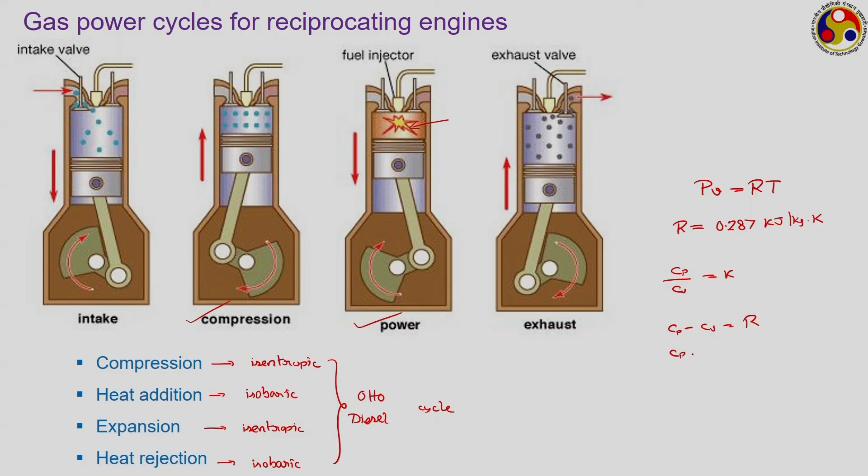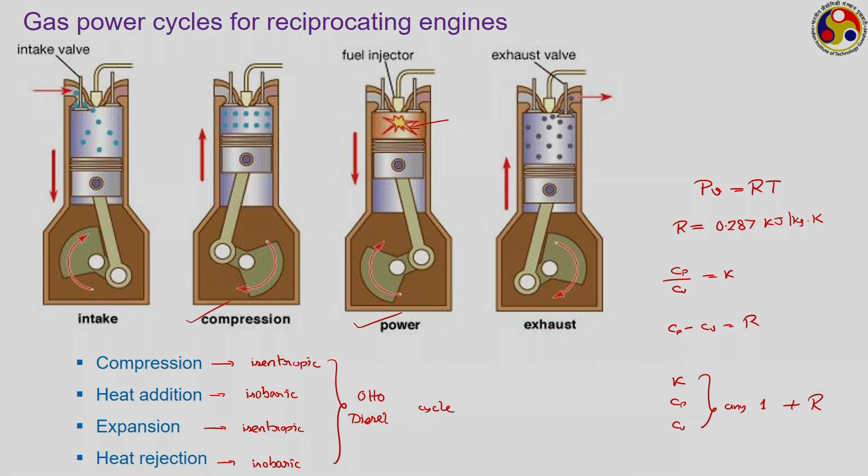Therefore, if we know any one of these three - K, Cp and Cv - plus R, which is already there, we can calculate the other two. So though in several textbooks you may find given values of Cp, Cv etc., we shall follow this methodology where we take R as a constant, specify one of the three - either K, Cp or Cv - and the remaining two need to be calculated for any given situation.

Now we move to the Otto cycle. These slides I have shown in the previous lecture itself. Nikolaus Otto is a German who was the first to conceptually develop this cycle. The one shown here is what goes in practice, but this is the corresponding air standard version of it.

We have the isentropic compression process as 1 to 2. So we have 1 to 2 as isentropic compression, then 2 to 3 as isochoric heat addition, then 3 to 4. What is 3 to 4? It is again another isentropic process, but during which volume is increasing and pressure is decreasing - an isentropic expansion process. And 4 to 1 is isochoric, as discussed in the previous slide - an isochoric heat rejection process during which volume remains constant.

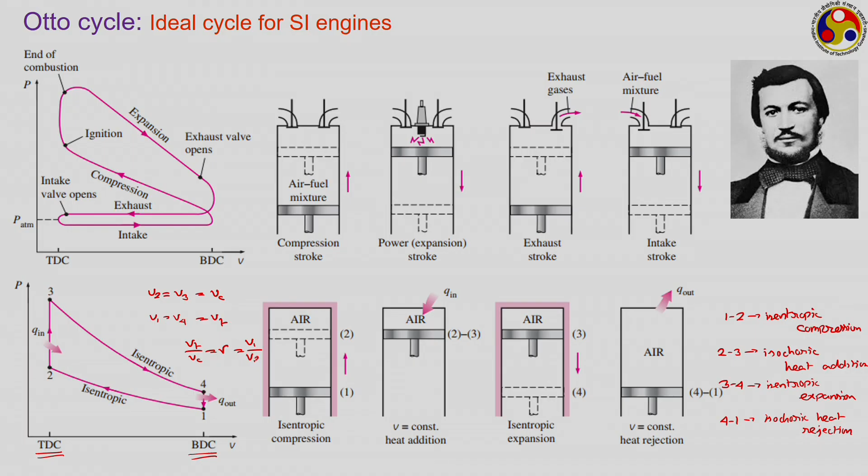Here the smallest possible volume the system can have is V2, which equals V3, corresponding to the top dead center. This volume V2, equal to V3, is nothing but the clearance volume, because the piston is at top dead center at that location. Whereas V1 and V4 are also equal, since 4 to 1 is isochoric, and this corresponds to the bottom dead center with total volume. As per our definition, Vt upon Vc gives the compression ratio. So this compression ratio can be represented as V1 upon V2, or in terms of V3 and V4 as well.

We have to perform the mathematical analysis quickly, something we've done in the previous lecture, but I'd like to repeat it because of a mistake I made there that I don't want to repeat. We know that the amount of heat transfer can be used to get the expression for efficiency, sometimes called thermal efficiency or first law efficiency, which is net work output divided by heat input. We use small w and small q to denote per unit mass quantities, and using the first law expression we can write this as 1 minus q out upon q in. So we have to get q out and q in. During process 2 to 3 we have heat addition, during 4 to 1 we have heat rejection, whereas during 1 to 2 and 3 to 4 there is no heat transfer. We have to analyze each process individually to get q out and q in. As there's no heat transfer with two of the processes, let's skip them for the moment and analyze 2 to 3 first.

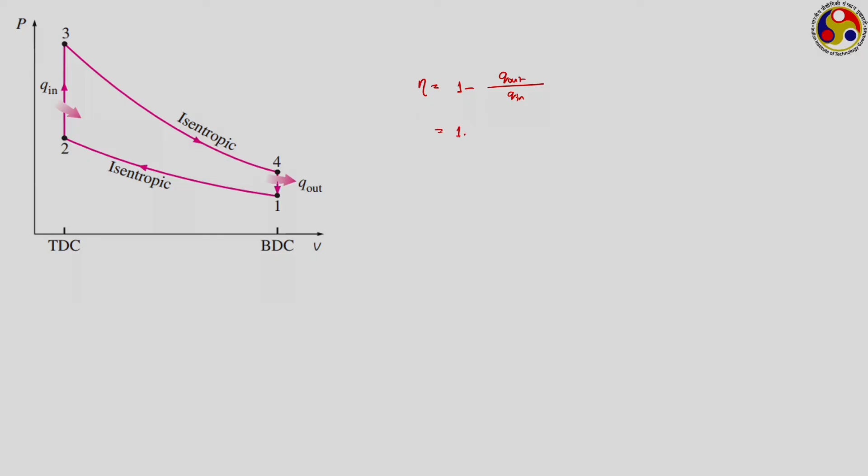Now we go back to our expression for efficiency, which is 1 minus Q out upon Q in. That is 1 minus, using the expressions derived here: Q out is Cv into T4 minus T1, Cv into T4 minus T1 by Cv into what was our Q in, Cv into T3 minus T2.

So Cv cancels out, and by taking T1 common from the numerator and T2 from the denominator, we can write this as T1 into (T4 upon T1 minus 1) by T2 into (T3 upon T2 minus 1).

Now, to get the values for these temperatures, we have to look at the other two processes, these two isentropic processes. During 1 to 2, being an isentropic process, the process equation can often be represented as Pv to the power k equal to constant, where k is the ratio of specific heats, and from the ideal gas equation of state we know that Pv equal to RT.

If we impose it here, we can write this to be Tv to the power k minus 1 equal to another constant. So if we use this for the process 1 to 2, I would like to request you to check this, from Pv to the power k, how we are getting Tv to the power k minus 1 by using Pv equal to RT. R becomes a part of this constant now. We just have to replace P.

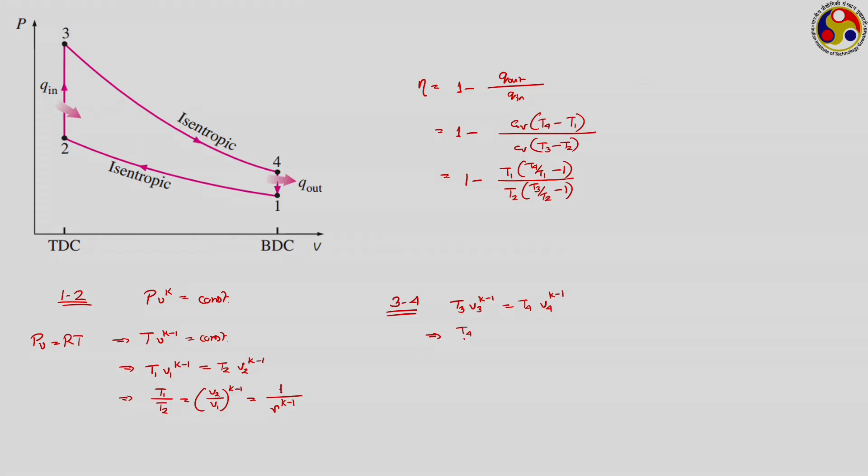Now check out process 3 to 4, another isentropic process. During this process we have T3 V3 to the power k minus 1 is equal to T4 V4 to the power k minus 1, which gives us T4 upon T3 to be equal to

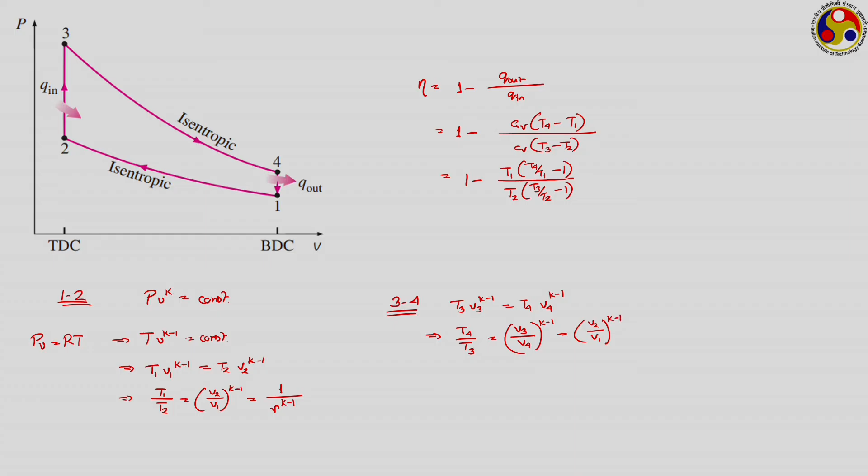V3 upon V4 to the power k minus 1. Considering the two isentropic processes, we know that V3 is equal to V2 and V4 is equal to V1, to the power k minus 1, and from here we know that V1 upon V2 is R. So it is 1 by R to the power k minus 1.

So what do we have then? We can write T1 upon T2 is equal to T4 upon T3, or if we reorient this, we can write T4 upon T1 is equal to T3 upon T2.

So, if we take it back to the expression for eta, then we are left with 1 minus T1 upon T2, and T1 upon T2 is nothing but this. So, we have 1 minus 1 by R to the power k minus 1.

So, the thermal efficiency for the Otto cycle is a sole function of the compression ratio and the K for the substance. It depends on only two things: one is the compression ratio, and another is the K for the substance. For a given substance, K can be taken as a constant, so it depends only on the compression ratio.

And like I mentioned in the previous lecture, compression ratio is the first and most important parameter that can govern the performance of a system. So, that is what you have here: the efficiency depends only on the compression ratio for a given substance.

This way you can calculate the efficiency. If your objective is to get some other parameter, like if you want to calculate the work output, how can you get it? The net work output, W net, can easily be obtained as eta thermal into Q in, from the efficiency expression. This way you can calculate the work output.

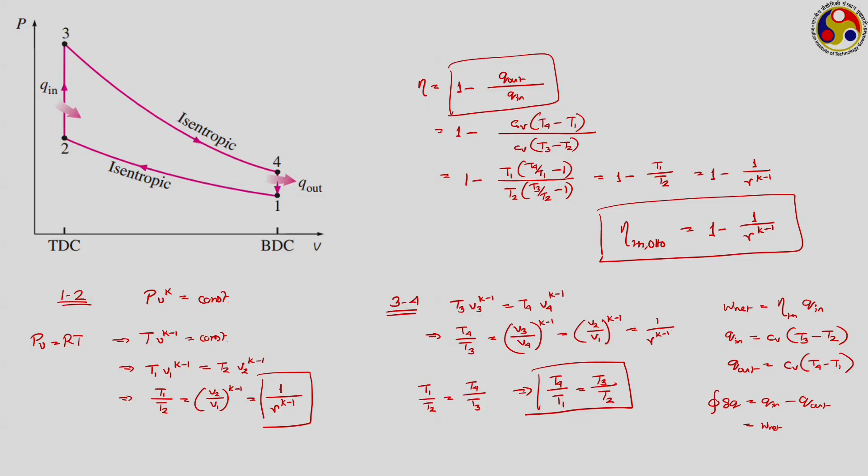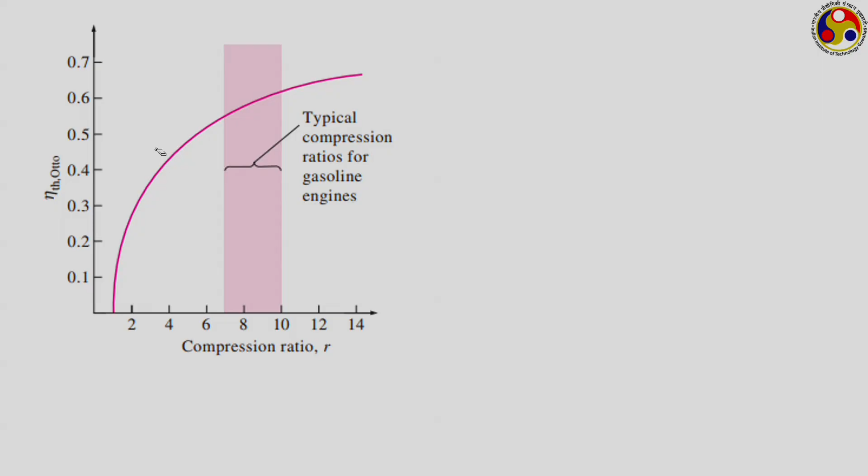Similarly, the effect of K is something like this: larger the value of K, higher will be the efficiency for a given compression ratio. So if we have two identical SI engines, one working on helium, which is a monoatomic gas, and another working on air, which can be visualized as a diatomic gas, then the helium one is going to give you higher efficiency because for the same compression ratio it has a higher value of K.

This corresponds roughly to monoatomic gases, this is approximately for diatomic gases, this is approximately for triatomic gases. So as K keeps on increasing, the thermal efficiency keeps on reducing. In practical engines, we generally have heavier molecules like carbon dioxide, carbon monoxide, or sometimes methane, which have much lower value of K, in the range of 1.2 or even lower, so their efficiency will definitely be much lower compared to these ideal cycles.

Now, you can see here I have given a range of typical compression ratios for gasoline engines. If we can get higher efficiency by working at a higher compression ratio, then why are we not going for such very high compression ratios, why are we restricting it to such a narrow band, something like 7 to 10 as shown here? Practical SI engines hardly have compression ratio greater than 10 or 12. That is because of temperature considerations.

You can see from the previous slides that as the compression ratio increases, the temperature also increases, because T2 is equal to T1 into R to the power K minus 1. So as R increases, T2 keeps on increasing. Higher the compression ratio, the temperature of the gas or air at the end of compression also keeps on increasing.

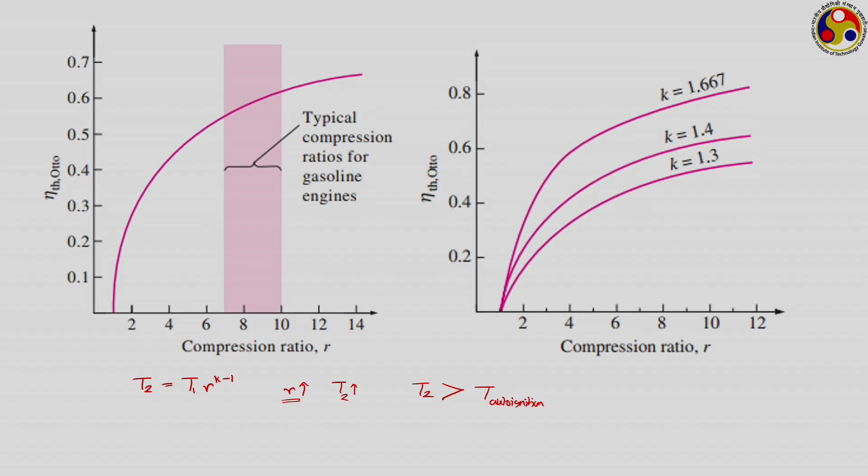If the fuel auto ignites, that leads to something known as engine knocking. There is a number called the octane number. I can't discuss this in detail since it's beyond our scope, but the octane number is generally a criteria related to this auto ignition temperature, and it identifies whether the fuel is going to auto ignite or not for a given compression ratio range. So in a nutshell, keeping the auto ignition temperature in mind, we have to keep the compression ratio limited.

Several attempts have been made to improve this octane number and thereby increase the auto ignition temperature. Since the 1920s, people started adding lead to gasoline fuels, which is a quite inexpensive option for increasing the octane number. Addition of lead has shown to increase the auto ignition temperature quite markedly.

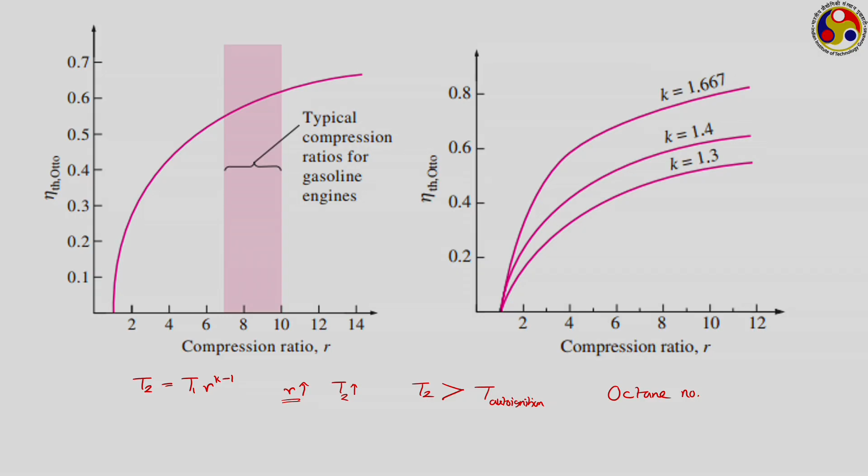However, when we came to the 1970s, it was observed that because of the presence of lead during the combustion process, lead participates in the chemical reaction and produces several very harmful gases, which are harmful to our health and of course lead to severe environmental pollution.

And that is why since 1975 gradually lead has been phased out from gasoline because of international protocol. In fact, automobile vehicles fabricated after 1975 are all suitable for unleaded gasoline, and so we are back to lower compression ratios.

Nowadays people use several kinds of gasoline blends, etc., which have been able to increase the auto ignition temperature a bit, causing some small change in the effective range of compression ratios, but still some way to go. This is a very active and open area of research, where we are looking to increase the auto ignition temperature of the fuel by making some blend or adding something to the raw gasoline, so that we can cause some increase in the compression ratio.

Even one level increase in the compression ratio can cause some 2-3% change in this Otto cycle efficiency, which can actually lead to a huge amount of fuel saving. That is why it is extremely important.

Now we move to the second one, the ideal cycle for CI engines, the diesel cycle, where we can go beyond this auto ignition temperature limit and reach much higher compression ratios. As the name suggests, it is the engine which uses diesel group of fuels as the working fuel. Rudolf Diesel, the picture shown here, was the German scientist who was the first inventor of the CI engine concept. The most important difference between SI engine and CI engine lies in the ignition process.

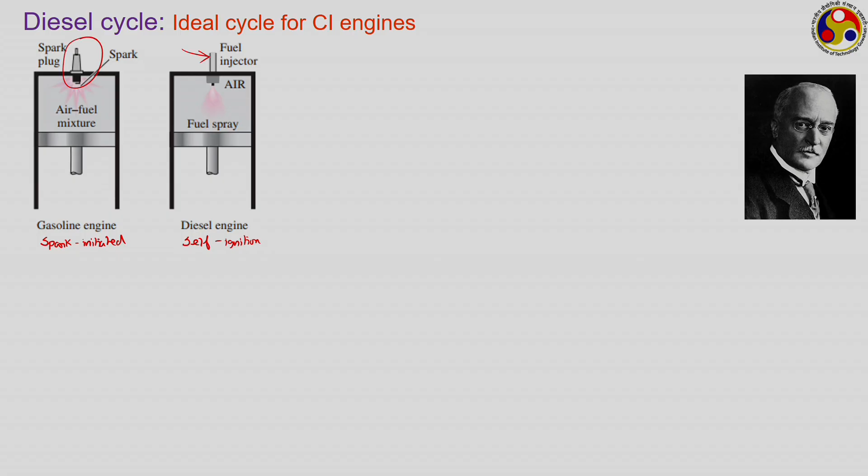In order to have this self ignition only, we supply only air during the intake process and compress that air to a very high temperature, and then the fuel is sprayed inside. That is a major difference in CI engines: it is only air which is supplied during the intake process, and only air is compressed because there is no fuel inside.

So we do not have to be bothered about the auto ignition temperature limit. We can compress air to very high pressure levels, and therefore we can go to much higher compression ratios in case of CI engines. Fuel is injected at the end of the compression process, and as the fuel comes in, invariably the temperature is well above its auto ignition temperature, and therefore the fuel auto ignites.

Then spark plug and carburetor are not required, because we do not need to produce any spark, and we are not preparing a fuel air mixture. Air is supplied at the beginning of the inlet process, and fuel is sprayed after the compression process. So carburetor is also not required, but we have a fuel injector, and we generally also need a fuel pump, because the pressure of the fuel needs to be higher than the pressure of air for it to be sprayed inside.

So we need a fuel pump and a fuel injector or spray gun, which are in fact much costlier and heavier compared to the spark plugs and carburetors, and also a higher compression ratio, as I have mentioned.

But one drawback here is the possibility of incomplete combustion, because in case of SI engine, the fuel and air are uniformly mixed in the carburetor before being supplied to the cylinder, so every fuel molecule generally has a sufficient number of air molecules around it. But here in the diesel engine, as the fuel is being sprayed inside, it is very much possible that some fuel droplets or fuel molecules may get sufficient oxygen in the neighborhood, and some droplets may not get any.

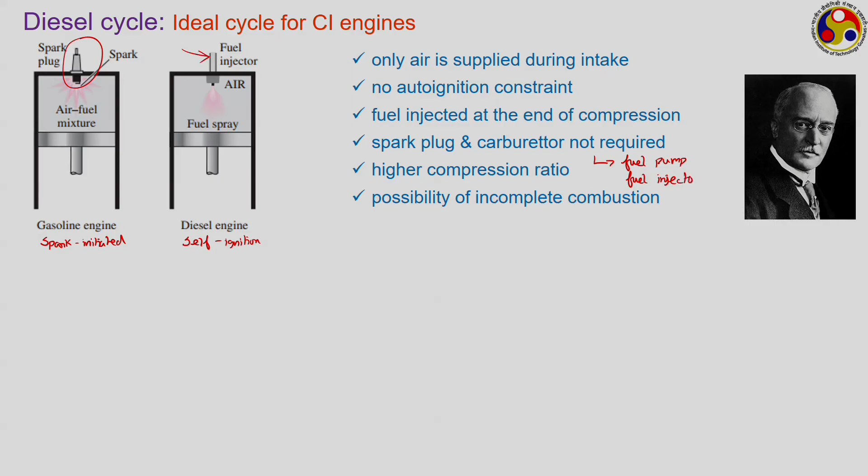So it is possible some amount of fuel may remain unburned, leading to incomplete combustion, loss of fuel, and subsequent pollution problems, which is not that significant for SI engines. So spark plug and carburetor are not there; instead we have a fuel pump and fuel injector, which are costlier and heavier compared to spark plugs and carburetors.

The heat addition in the ideal cycle is visualized as constant volume, because in case of SI engine, as soon as we initiate the spark, combustion happens almost instantaneously before the piston starts to move again. That is why we assume it to be a constant volume combustion.

However, in case of CI engines, as we are spraying the fuel, that requires a substantial amount of time to supply a fixed mass of fuel, and by that time the piston keeps on moving. So we generally try to spray the fuel such that the pressure inside remains constant, achieving this combustion process at constant pressure. However, there is a change in volume.

We of course want to reduce this to a smaller level, but that depends upon how much mass of fuel you have to inject and also the design of the injector.

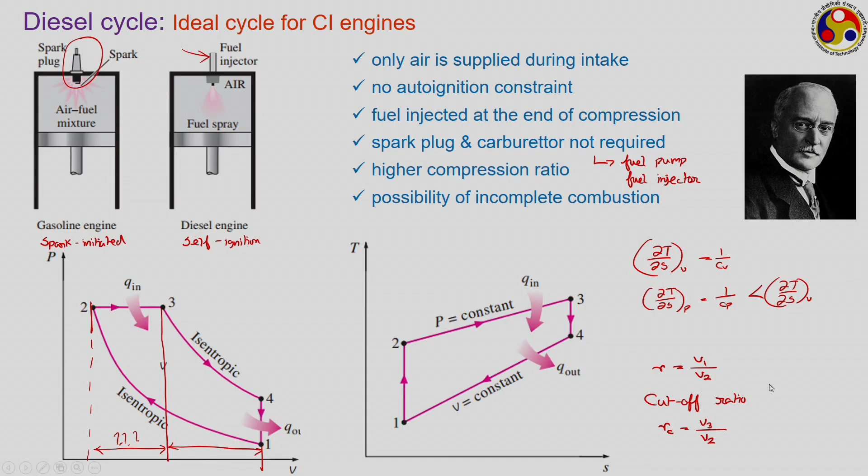Here we define a new parameter called the cutoff ratio, given by Rc, which is volume after combustion, V3, by volume before combustion, V2, that is volume at the end of combustion to volume at the beginning of combustion. This is a new parameter required for diesel engines.

So if we analyze it again, let us try to do it quickly. The thermal efficiency is again 1 minus Q out by Q in, for process 2 to 3.

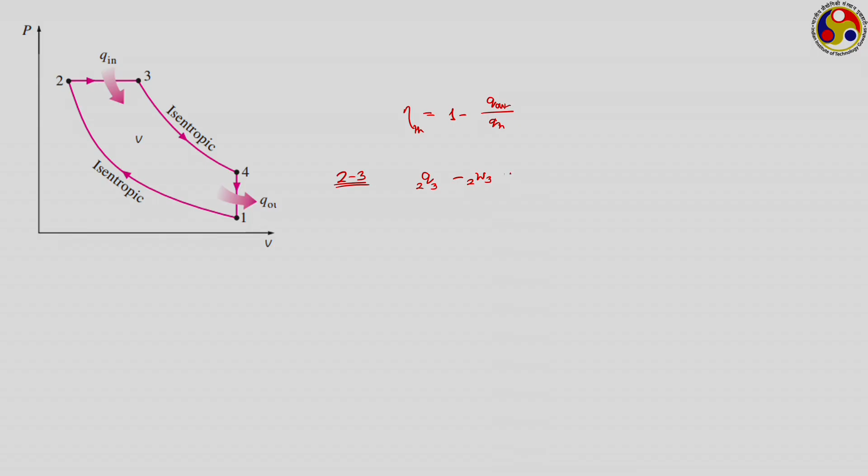For process 2 to 3, Q 2 to 3 minus W 2 to 3 is equal to U3 minus U2, as earlier. Now, Q 2 to 3 is Q in, but W 2 to 3 is not 0 in this case, because it is not a constant volume process. W 2 to 3 is equal to the integral from 2 to 3 of P dV.

Now pressure remains constant during this process, isn't it? So you can write this to be equal to P into V3 minus V2. So Q in will be U3 minus U2 plus P into V3 minus V2, that is we can write this to be equal to U3 plus P3 V3 minus U2 plus P2 V2, as P2 equals P3.

What is U plus PV? That is enthalpy. So it is H3 minus H2, and for an ideal gas we know this is equal to Cp into T3 minus T2.

Similarly, for process 4 to 1, we can write the same way as done earlier: Q 4 to 1 minus W 4 to 1 is equal to U1 minus U4. Now Q 4 to 1 is minus Q out, and it is a constant volume process, so W is 0, giving 0 equals U1 minus U4. So Q out is equal to U4 minus U1, which is Cv into T4 minus T1.

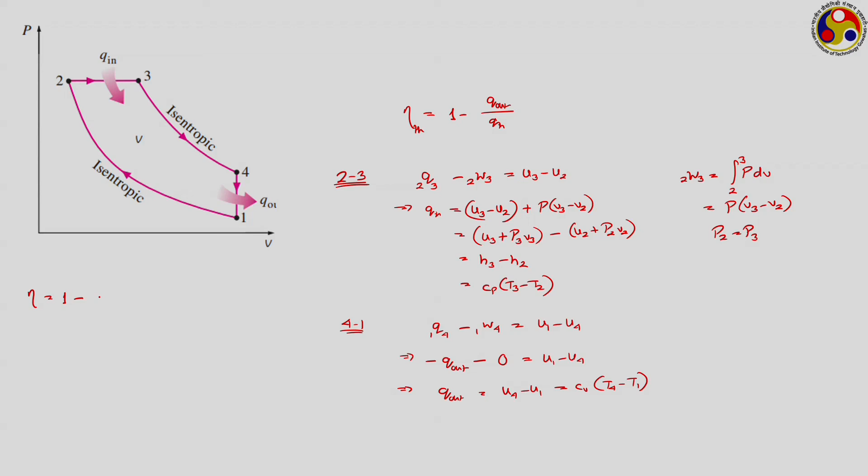If we want to analyze this now, eta is equal to 1 minus Q out by Q in. Let us do it here itself. Eta equals 1 minus, Q out is Cv into T4 minus T1, Q in is Cp into T3 minus T2, and Cp upon Cv is k.

So you can write it as 1 upon k into the same ratio. If we take T1 common from here, okay, there's no need of doing this for the moment now. Let us just write it as the ratio of temperatures, that is T4 minus T1 by T3 minus T2.

Now we have to evaluate each of these temperatures. So let us try to analyze each of the processes one by one. Now 1 to 2 is an isentropic process.

So for an isentropic process, we have already seen that we can write T2 equal to T1 into R to the power k minus 1. 2 to 3 is a constant pressure process.

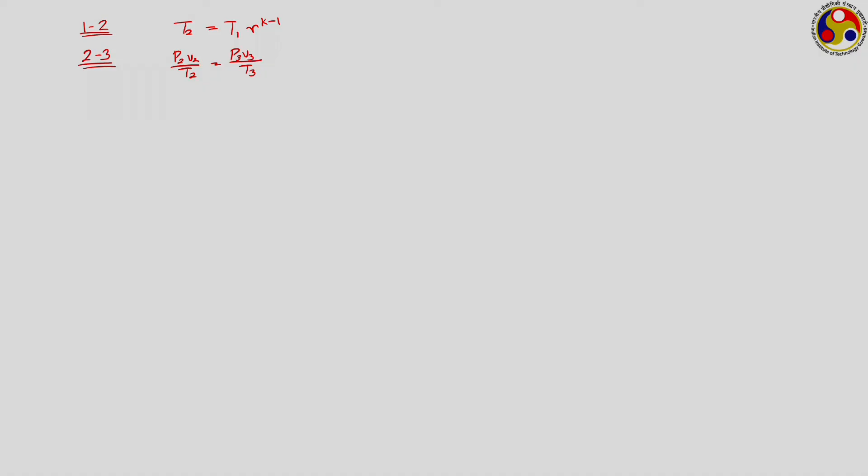So for a constant pressure process, using the ideal gas equation of state, we can write P2 V2 upon T2 is equal to P3 V3 upon T3, that is T3 upon T2. P2 and P3 are equal to each other because it is a constant pressure process. So T3 upon T2 is equal to V3 upon V2, which is equal to Rc, which we have just defined.

So T3 is equal to T2 into Rc, that is T1 into Rc into R to the power k minus 1, for process 2 to 3.

Similarly, for process 3 to 4, look at the diagram: 3 to 4 is an isentropic process. So for an isentropic process, just like we have written earlier, T3 V3 to the power k minus 1 is equal to T4 V4 to the power k minus 1, that is T4 upon T3 is equal to V3 upon V4 to the power k minus 1.

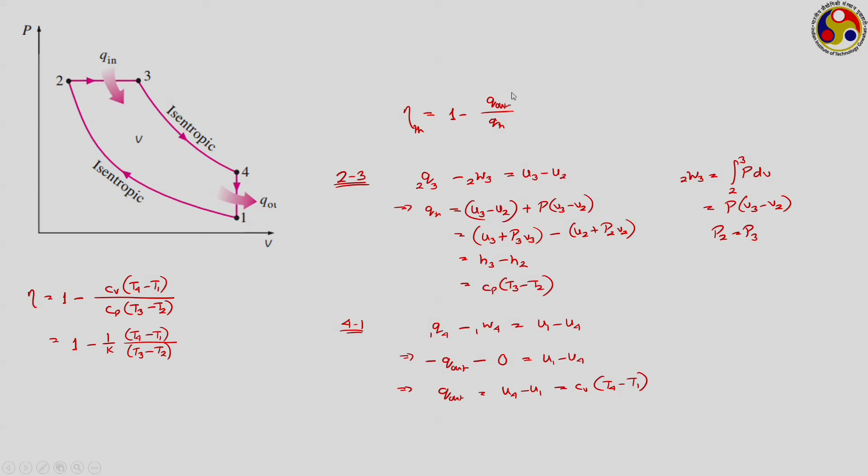And what is your V3? V3 is RC into V2. And what is your V4? Look at this diagram: V4 and V1, 4 to 1 is a constant volume process, so V4 and V1 are equal. So V4 is equal to V1, to the power k minus 1, that is equal to RC upon R to the power k minus 1.

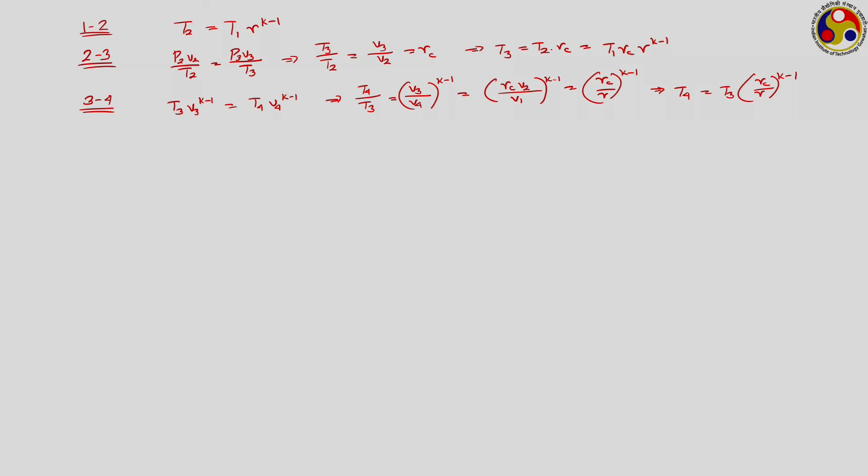So we have T4 equal to T3 into RC upon R to the power k minus 1, from where you can put back the T3 expression in terms of T1. Now if you combine all of them, I am directly writing the expression for the efficiency for a diesel cycle. You just have to take these 3 expressions for T2, T3 and T4 and put it here.

If you do it, you get the thermal efficiency for an ideal diesel engine to be 1 minus 1 by R to the power k minus 1, into RC to the power k minus 1 by k, into RC minus 1. This is the expression for the ideal diesel cycle.

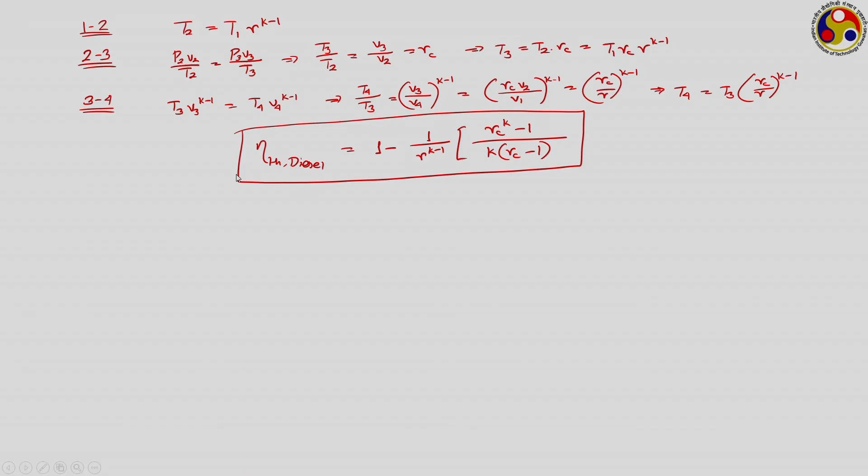If we plot it in terms of compression ratio, again you will see that for a given value of RC, as R keeps on increasing, the typical compression ratio for diesel engines is much larger. The range is 12 to 23, 24, well above the same for SI engines. CI engines are used in heavy vehicles where you need larger power, like buses, trucks, ships, etc., whereas SI engines are commonly used in two-wheelers, smaller passenger cars, etc. Diesel trains can also be an example of CI engines.

Whereas SI engines are generally restricted to low power applications because the compression ratio is lower. One interesting thing you can see: if we put RC equal to 1, this expression will lead to a 0 by 0 situation, but RC equal to 1 actually refers to an Otto cycle, and for RC equal to 1 you get the highest efficiency for a given value of compression ratio. In fact, with increase in cutoff ratio your efficiency decreases.

With increase in cutoff ratio the efficiency decreases; of course it increases with compression ratio. So your efficiency increases as R increases, but RC has to decrease for this, and RC equal to 1 refers to the Otto cycle. You can see from the expression also, the term in this square bracket, RC is always greater than 1, and k is also greater than 1.

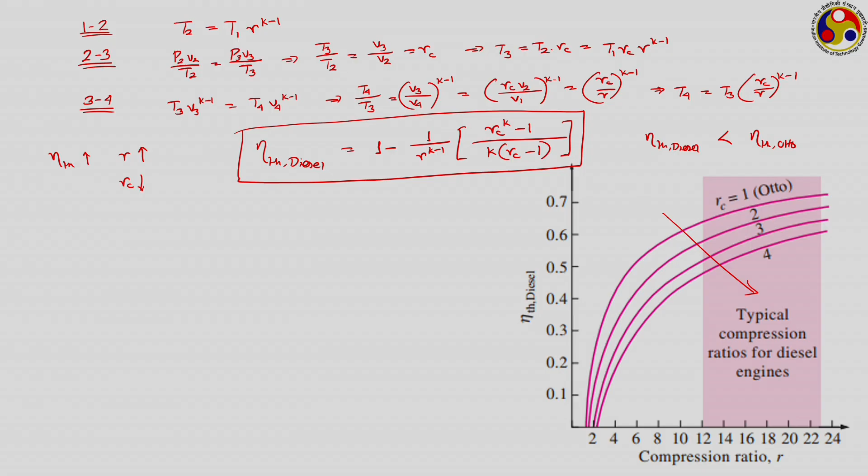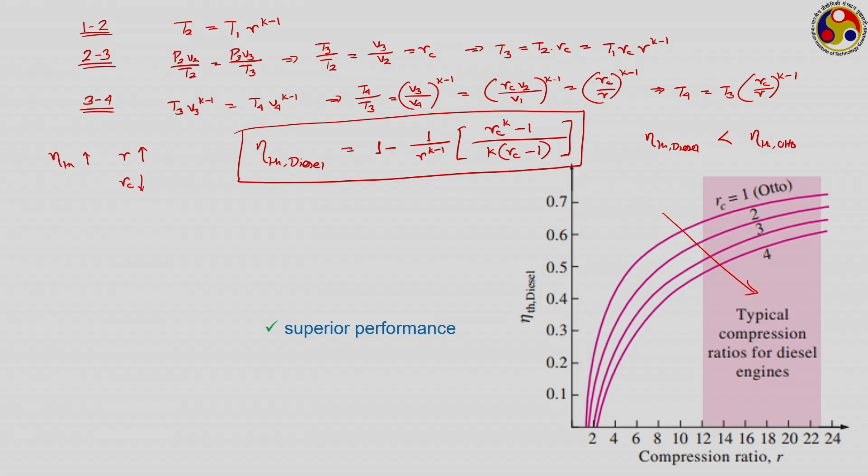So the term in the square bracket will always be greater than 1. If the term is greater than 1, then from here we can easily see that for a given value of R, eta thermal for diesel will always be less than eta thermal for Otto. But practically speaking, diesel cycles or diesel engines always operate with much higher compression ratio than Otto cycle based engines, and therefore they offer higher efficiency. So the advantage of CI engines is superior performance because they work at higher compression ratio, they give higher work output, much better efficiency, and that is why they found application in bigger commercial vehicles.

Another commercial reason is the fuel is cheaper. As we are spraying the fuel inside, we can use heavier fuel and also less refined fuel, whereas in SI engines we need very fine fuel, that is why we have to go for petrol or gasoline, which is a better brand or superior grade of petroleum.

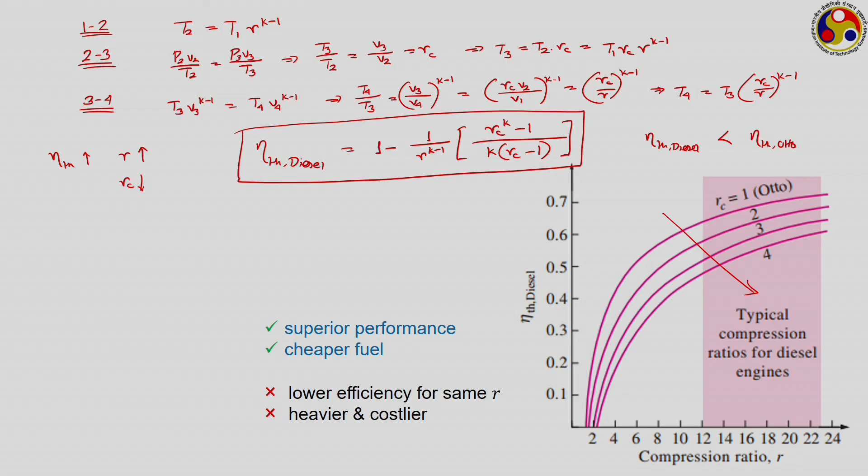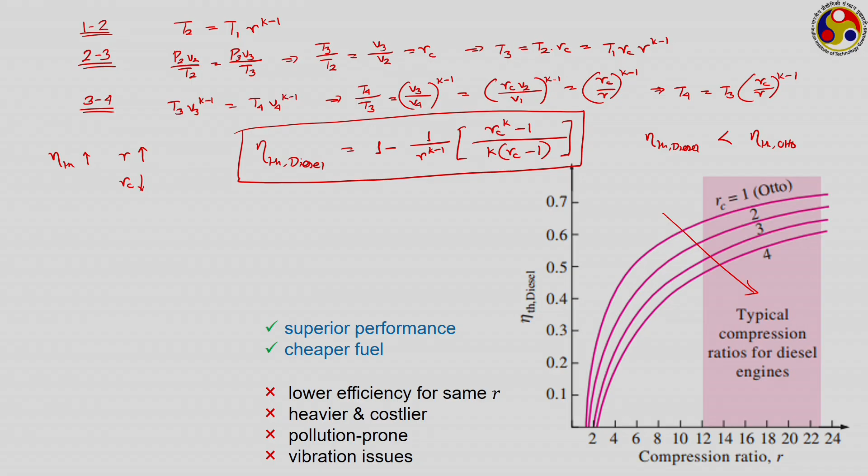But the disadvantages of CI engines are: for the given compression ratio their efficiency is lower, they are heavier and costlier. Since they work at much higher compression ratio, the pressure range inside the engines is higher, so the engine structure has to be much stronger, and components like fuel pumps and injectors are also heavier and costlier compared to a spark plug. They are also pollution prone because of incomplete combustion, and because of the higher pressure range and heavier structure, vibration is another problem, which is one of the big issues preventing CI engines from being applied to two-wheelers or smaller cars.

Now, we have seen that in SI engines, in Otto cycle, we consider the combustion to happen at constant volume, whereas in diesel cycle we have seen it happening at constant pressure. Practically, both of these are not correct; combustion actually happens partially in constant volume mode and partially in constant pressure mode. So a somewhat intermediate cycle is defined in the form of the dual combustion cycle, where it is visualized that combustion is partly happening at constant volume and partly at constant pressure.

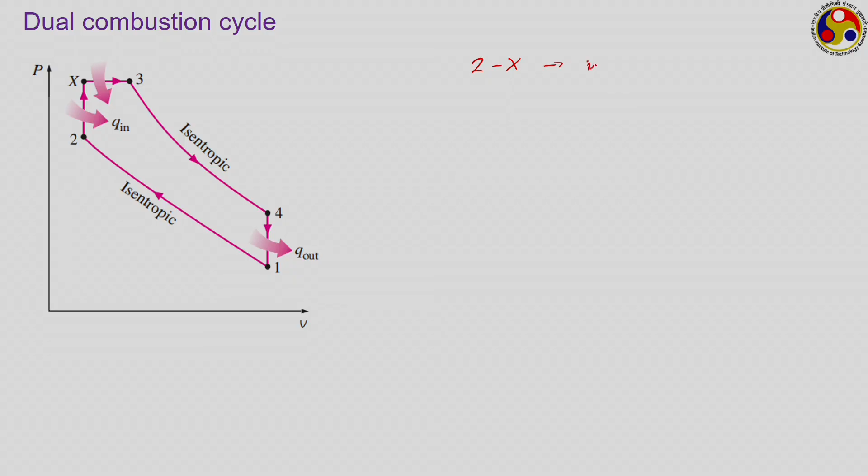Here this 2 to x refers to an isochoric heat addition part, whereas this x to 3 refers to an isobaric heat addition part. So total heat added will be heat added during the process 2 to x plus process x to 3.

The heat rejection of course remains the same, that is at constant volume. The same way you can perform the analysis of this one. I am leaving this to you, as we have already done the analysis for Otto cycle and diesel cycle step by step. You will surely be able to do this. I am just giving you the expression for this dual cycle, the expression for efficiency.

It will be 1 minus 1 by r to the power k minus 1, into Rp into Rc to the power k minus 1, by Rp minus 1 plus k into Rp into Rc minus 1. Here this R remains the same, that is volume before compression by volume after compression, V1 by V2,

which is greater than 1. Rc is the cutoff ratio which corresponds to the isobaric part of heat addition. It refers to volume after constant pressure heat addition by volume before constant pressure heat addition, which is Vx. Rp is called the pressure ratio.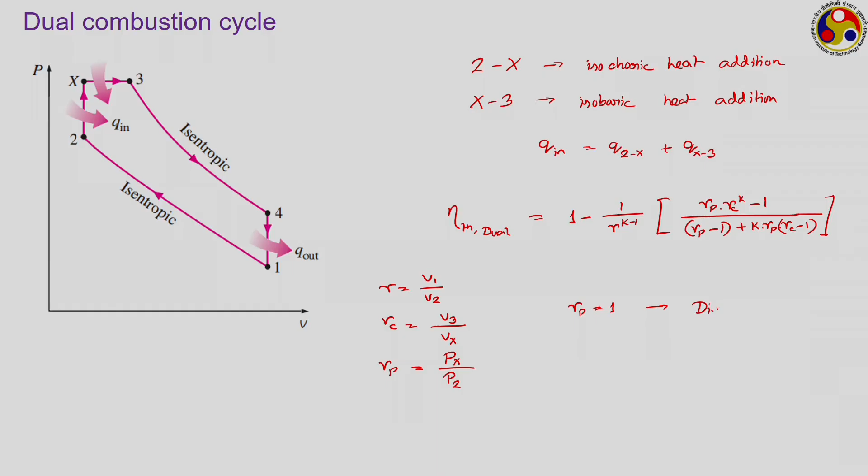Like if we put Rp equal to 1 in this, just put Rp equal to 1, see what you are getting. When you are putting Rp equal to 1, it reduces to the diesel cycle. Rp equal to 1 means this point x collapses to point 2. So your 2 to 3 line will be something like this, which is just what we have in case of diesel cycle.

Whereas if we put Rc equal to 1, it collapses to Otto cycle. Rc equal to 1 means point x and point 3 they collapse on each other. So the expansion starts from this particular point onwards only. So this will be your expansion stroke in that case. So you can see from the mathematical expression also, this is a good combination of both the cycles.

And from efficiency point of view, for a given compression ratio, we can always show that thermal efficiency for the Otto cycle is greater than the efficiency for the dual cycle, and that is greater than the efficiency for the diesel cycle. Now, we shall quickly be trying to compare the Otto and diesel cycle in terms of a few parameters.

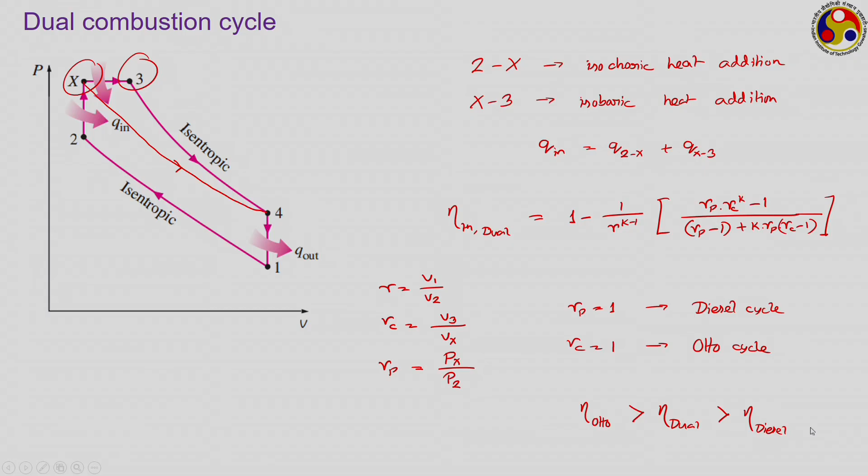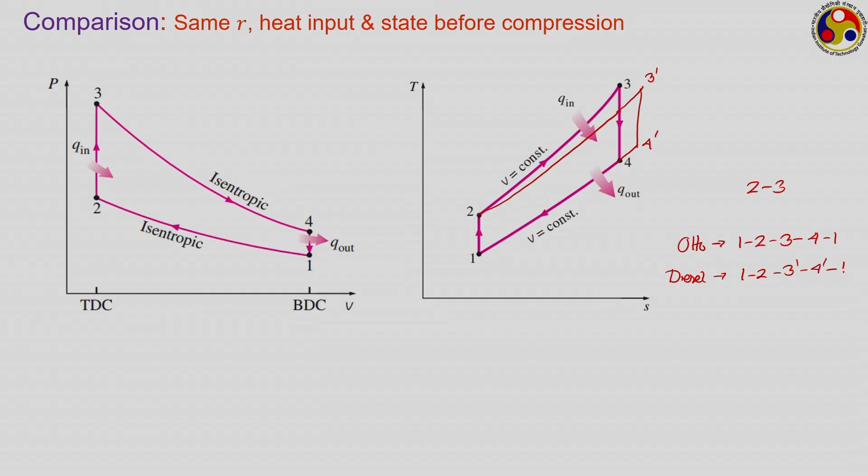So like this way we have to plot, your 4 prime also gets shifted here. Your Otto cycle diagram is 1, 2, 3, 4, 1. The diesel cycle diagram now becomes 1, 2, 3 prime, 4 prime, 1. If we want to draw the same thing on the PV diagram, we extend up to some point, 3 prime, which goes like this, and then we have 4 prime somewhere here. So 1, 2, 3 prime, 4 prime, 1, which corresponds to same compression ratio, same state before compression, and same amount of heat input, but different amount of heat rejection.

Now again we compare the efficiencies: 1 minus Q out by Q in. Here Q in is same. Which one has larger Q out? Look at the diagram. Q out refers to area under the heat rejection curve. For the Otto cycle, heat rejection is 4 to 1, so this area is the heat rejection corresponding to the Otto cycle.

How much is it for the diesel cycle? For diesel cycle, your area is this much. So Q out for diesel is greater than Q out for Otto. Here again, as it has larger heat rejection but same amount of heat input, the thermal efficiency for the Otto cycle is greater than the thermal efficiency for the diesel cycle.

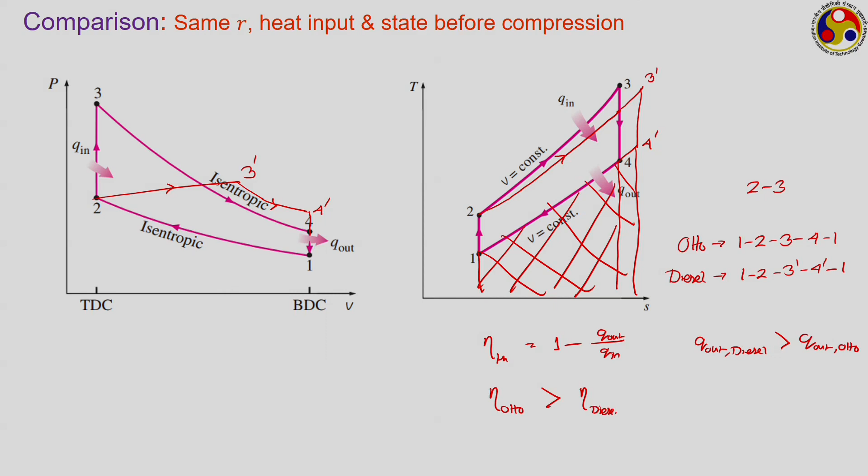One final comparison, which is very important from a practical point of view: compression ratios are not same, state before compression is same, which is point 1, and the maximum pressure and temperature remain the same. Which point in the cycle has the same maximum pressure and temperature? Point 3 — this is the one corresponding to maximum pressure and temperature. So 1 and 3 are same, but other points are different.

So how can we compare them? Again the Otto cycle is shown. To plot the diesel cycle here, point 1 remains the same. Let us extend this line vertically. This line goes like this, and through point 3 the constant volume line is already there, which leads to point 2. We backtrack a constant pressure line, so the constant pressure line will be somewhat like this, leading to point 2 prime.

This is your 2 prime, 3 and 4. Similarly here it is actually going out of the scale. If you want to plot it, you have to continue up to this point and then somewhat like this. So this becomes your point 2 prime, and 3 remains the same, 4 also remains the same.

So which one has a higher amount of heat rejection in this case? Both have the same heat rejection. What about Q in for the diesel versus Q in for Otto? Which one is higher? Q in for the diesel is definitely much higher in this particular case, because the area under the curve 2 prime to 3 is much larger than the area under the curve 2 to 3. So efficiency in this case for the diesel will be greater than the efficiency for the Otto cycle for this particular case.

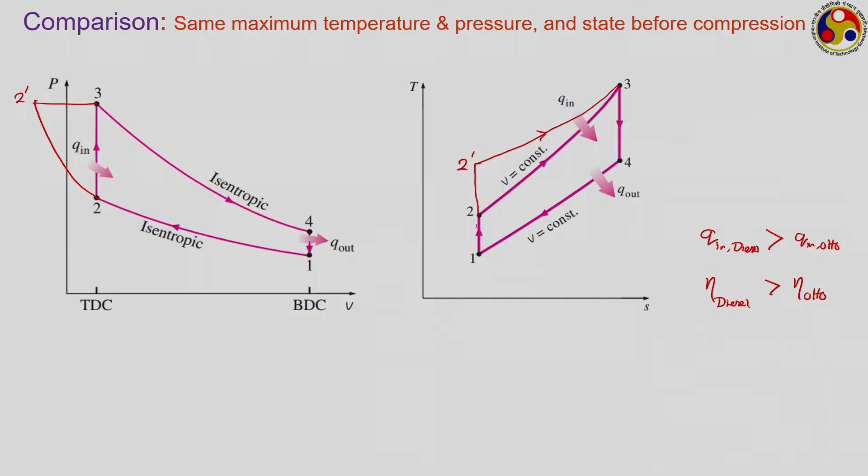There are several other comparisons also we can think of. You can also try to think of a few other comparisons. That takes us to the end of today's lecture, where we have discussed the Otto, diesel and dual combustion cycles, and also compared the cycles in terms of three different criteria.

So in the next lecture I would like to first solve a few numerical problems to show the application of these cycles and how to approach the solution without trying to remember the mathematical formulation, and then we shall be discussing two more cycles, the Stirling and Ericsson cycles. Till then, goodbye.